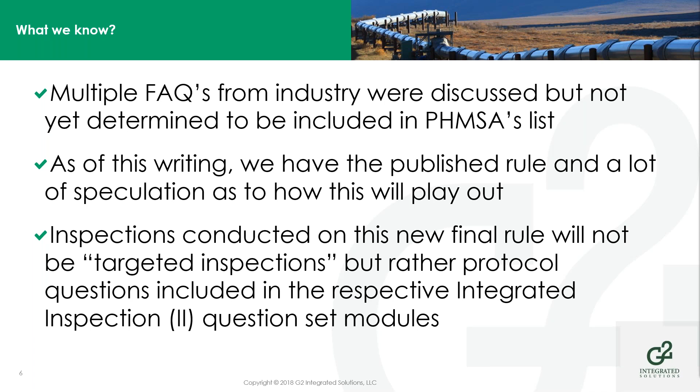Inspections that are going to be done on this final rule, as was instructed in that meeting, are not going to be targeted inspections. In other words, they're not going to come out and do an inspection based entirely on this final rule, but questions and inspection audit guidance will be given through the integrated inspection process and through those modules. Of course, if there are particular areas of this final rule that don't seem to be met with compliance, you could fully expect that PHMSA would come out and pay close attention to these new additions.

The major provisions of the rule were driven by the Pipeline Safety Act of 2011 and other things as well, but in particular, the 2011 Act added a 6-month grace period to the 7 calendar year reassessment interval. Many of our rules, as you know, have extensions added to them. Many of our reoccurring events give us a grace period, if you will. This Safety Act added that 6-month grace period, but again, it's something that has to be requested. It's not automatic. The Act also provided for the requirement to consider seismicity in identifying potential threats, and that operators have to report any exceedances of their transmission pipelines' MAOP.

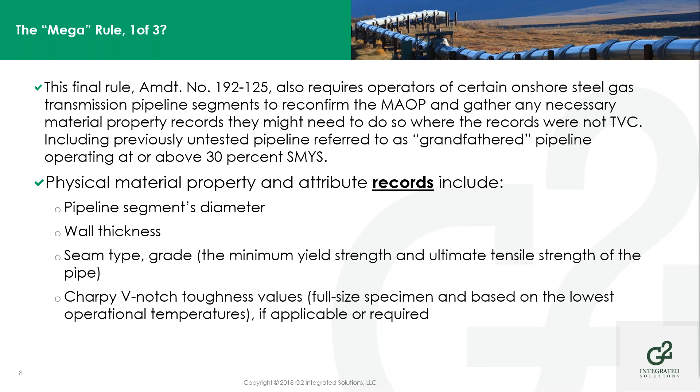It also requires operators of certain transmission lines to reconfirm the MAOP. Basically, this is talking about pipelines that do not have TVC records, traceable, verifiable, complete records, or were previously untested. They were grandfathered, if you will, in the beginning of the regulation. They have to determine their physical material property attributes, and the records have to include the segment's diameter, wall thickness, seam type, and grade. In other words, you basically have to figure out what kind of pipe you have in the ground if you don't know already.

Prior to the rule's publication, integrity assessments were only done for HCAs, correct? This particular rule now adds class 3 and 4 locations and a new defined area called moderate consequence areas. And these assessments have to be done within 14 years of the rule's publication, and then reassessments every 10 years

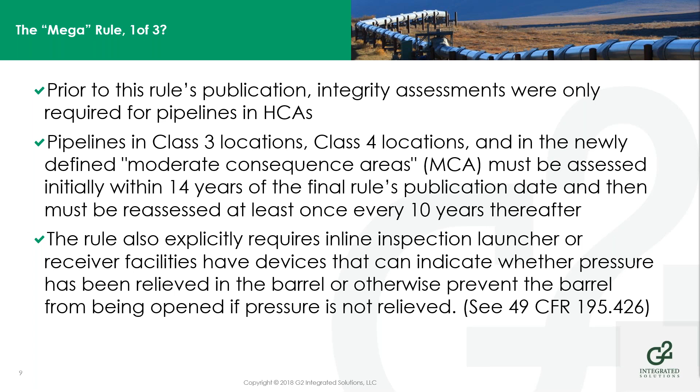thereafter. It also now requires that inline launchers and receivers on the gas transmission pipelines have a device that will indicate whether there's still pressure in the barrel, or be equipped with a door or a mechanism that won't allow that barrel to be opened if there is still pressure in the barrel, which is a very similar regulation that is also mirrored over in 195 for liquid pipelines and 195.426.

On April 22nd of this year, PHMSA issued a notice of enforcement discretion. The file name is Stay of Enforcement. PHMSA doesn't intend to take enforcement action relative to the July 1st, 2020 compliance deadline because of the national emergency that we're currently in. They're going to extend that period out to December the 31st, and normal enforcement will resume at that point in time. But that's not a get out of jail free card.

It's not a don't have to do anything card. It's simply saying PHMSA expects all affected operators to continue to work towards compliance, and they're going to fully expect to see your records demonstrating that you have done that. Even though you may not be able to achieve compliance by July the 1st, you're still making a concerted effort to do so.

Now, the rule itself, the amendments include 191 for reporting malfunction or operating error that causes the pressure to build up and allowed for operation of pressure limiting control devices to occur for underground natural gas storage facilities or LNG facilities. This section is broken out unto itself for those two areas, and then section 10 is added for transmission lines only.

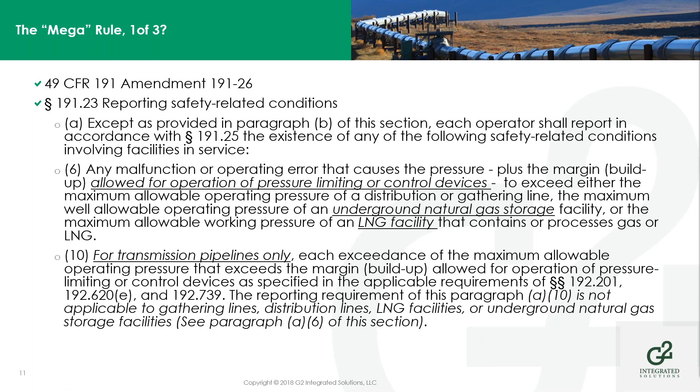You have to report that MAOP exceedance to PHMSA. It excludes the gathering lines, distribution lines, LNG facilities, and underground natural gas storage facilities. So that modification to the reporting of safety-related conditions was made. Also, filing safety-related condition reports, what has to be done now is it has to be sent to the associate administrator. That's a change. The 5 working days period is there, and the 10-day period is there for discovery and determination.

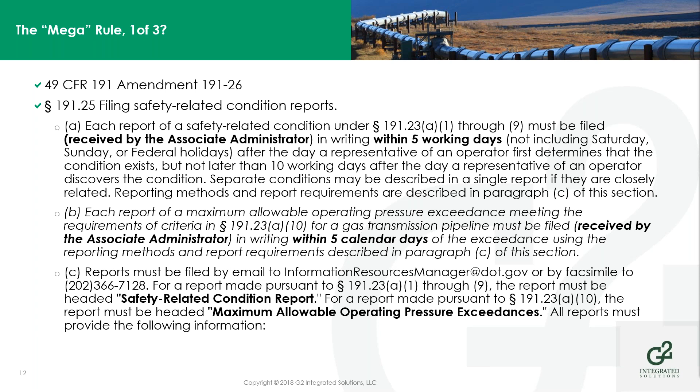Maximum allowable operating pressure exceedance is the same way, and the reports have to be filed or emailed, headed safety-related condition report, or headed maximum allowable operating pressure exceedance report, specifically to PHMSA in that time period, to the associate administrator. Filing has to include your operator ID now. The 8 items that are there are fairly the same, but there are some additions talking about having to make sure we have the operator ID included.

Sorry about that screen glitch.

New definitions in the code also include engineering critical assessment. It's a documented process that has to be done. You have to include the operating history in your assessment, the environment the pipeline lives in, the in-service degradation that you know about, possible failure mechanisms that you know about, final defect sizes, any future operating or maintenance procedures that are going to be used to determine the maximum tolerable sizes for imperfections.

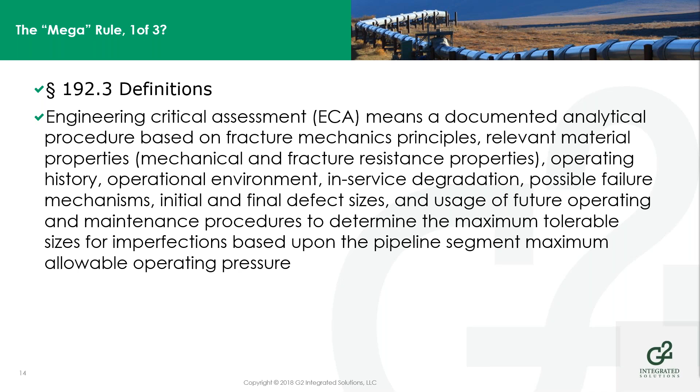So essentially, you're doing a critical assessment of the pipeline segment to determine the maximum allowable operating pressure. It's going to be a very detailed operation. It has to be very specific to the segment of pipeline that's in question. I don't think you're going to find a software package that you can plug the numbers into that is going to give you an answer. You're going to have to do this specifically for the segments that you're dealing with.

Moderate consequence area was added. It talks about a potential impact circle as defined in 903 based on the PIR: 5 or more buildings intended for human occupancy, and any portion of a paved surface or road. Now, the clarity for that paved surface road, including shoulders, designated interstate, freeway, expressway, principal arterial roadways, is contained in the Federal Highway Administration's Functional Classification Concepts, Criteria, and Procedures, Section 3.1.

So you go there and you look at what it says in that section of the regulation, and it gives you a better definition of what it's looking for. And of course, again, this is a moderate consequence area. It doesn't meet the definition of a high consequence area. So it doesn't supersede HCA. If it's an HCA, it's an HCA. But if it's an MCA, it's going to be included based on this criteria.

So the length of the moderate area extends axially along the pipeline, and it's going to go from the first potential impact circle and out through the outermost edge of the last contiguous potential impact circle. Contiguous, so it's connected with 5 or more buildings intended for human occupancy. But the roadway data is going to be a challenge here. A lot of the states, a lot of federal highways or databases are there.

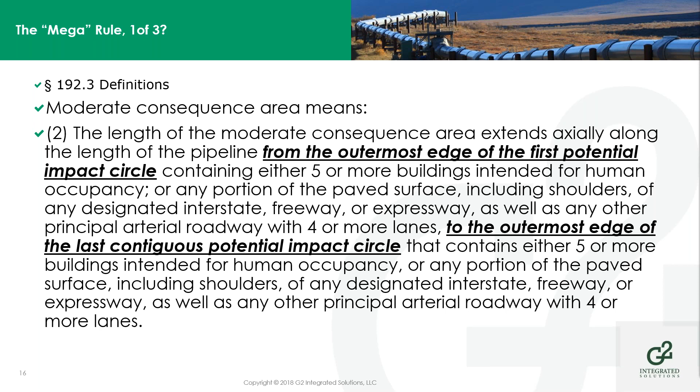But within our states, there are some areas in the country where that data defining these interstate, freeway, expressway, or arterial roadways may be a little more difficult to find. So it's going to be incumbent upon the operator to determine that based on their own operating conditions and where their pipelines cross these roadways.

Section 3.1 talks about other principal arterial roadways. For the most part, they fall into the top 3 functional classifications in that document, section 3.1. And the difference is there are usually multiple arterial routes serving urban areas, and then where there may be only a single arterial roadway serving a rural area.

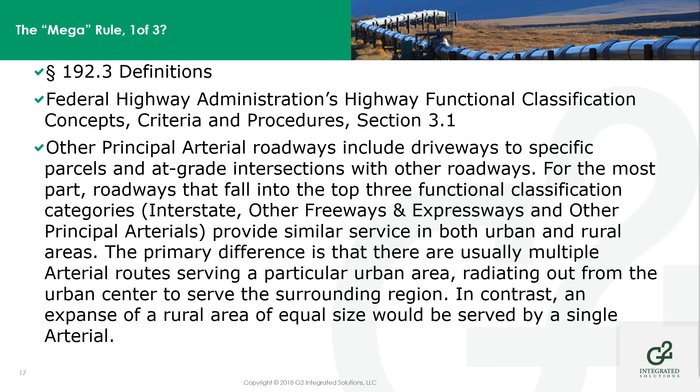Class locations: records have been added to class location definitions there, section D. You have to have records that document the class location of each pipeline segment and that demonstrate how the operator determined those sections. Where you didn't have to have that record in the past or it didn't specifically call it out, it now does.

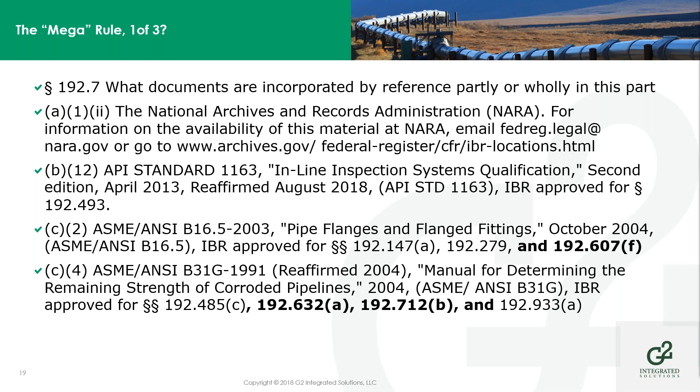And what documents are incorporated by reference? There's some changes here. There's some things that were added, and there are some references added. So for inline inspection systems, API 1163 was added. For ASME B16.5, for flanges and flanged fittings, a code reference was added for 607F. For B31G, for determining remaining strength, code citations 632A and 712B were added to that IBR section of the code, as well as the ASNT code references were added.

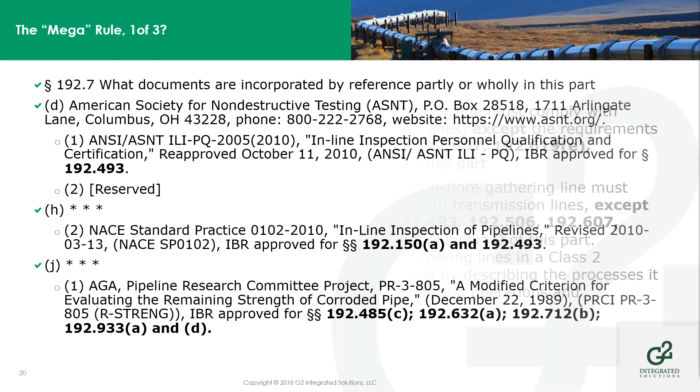Section D, this whole section was reorganized, so the old numbers don't line up with the new ones. But this ASNT inline inspection personnel qualification standard was added for section 493, and section H references the 192-150 and 192-493 sections of the code. And then of course the modified criteria for evaluating remaining strength, also 485, 632A, 712B, 933A were added as code citations, code references.

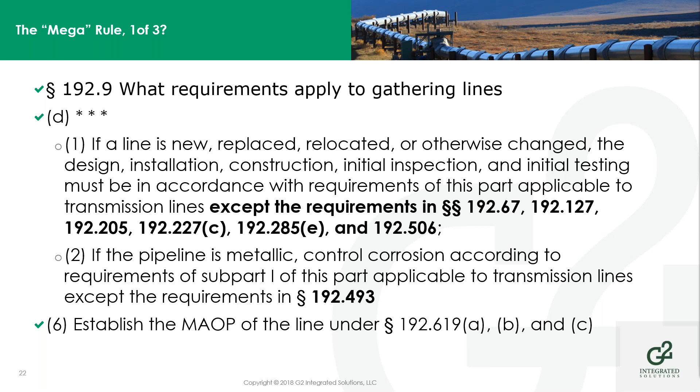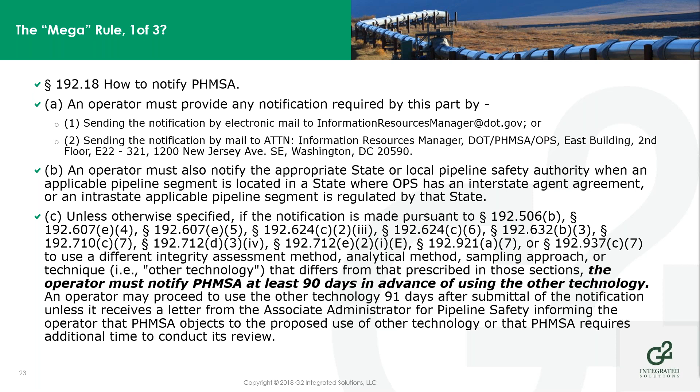So how to notify PHMSA? Section 18 was added to the regulation. This is the notification section, and it's referenced in multiple areas of the regulation. There are places where it says if you're going to do something, you have to notify PHMSA 90 days in advance of using other technologies. So basically 192.18 describes when you have to do that and how you have to do that notification process. And of course, any intrastate agency as well.

So 67 talks about records for material properties for steel transmission lines installed after July 2020. You must collect or make and retain for the life of the pipeline records documenting the physical characteristics of the pipe. For those steel transmission lines installed on or before July 2020, if you have records documenting the tests, inspections, specifications, you have to retain them for the life of the pipeline. And for anything installed on or before July 2020, if the operator doesn't have records, you must then follow 624 in establishing the material properties of your pipeline.

For 127, for pipe design records, again, basically the same thing, installed after July 2020. You must collect, make and retain for the life of the pipeline records documenting the pipe was designed to withstand its external pressures and loads. And for steel transmission lines on or before July 1st, 2020, have records to document the design and determination of design pressure. And then if you don't have records, again, you're going to follow 624, which we'll get to in a little bit.

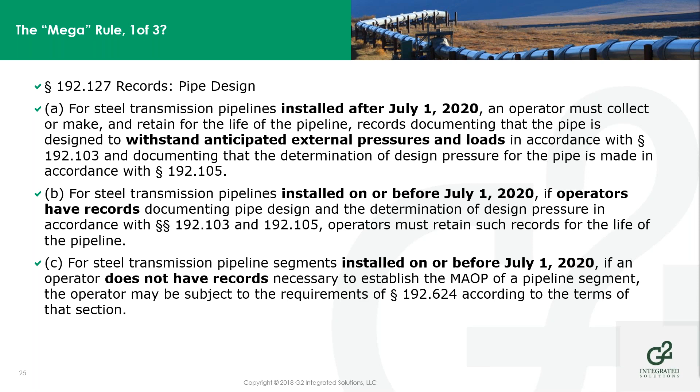Passage of internal inspection devices. This is the one where we talk about having to design and construct and accommodate the passage of ILI devices in your pipelines if they're built in the future. Except as provided in B and C, each new transmission line and each replacement pipe, valve, fitting or other line component. So as we go forward from July 1st, 2020, you're going to have to make sure that pipeline is designed and constructed or repaired with its ability to pass an ILI device.

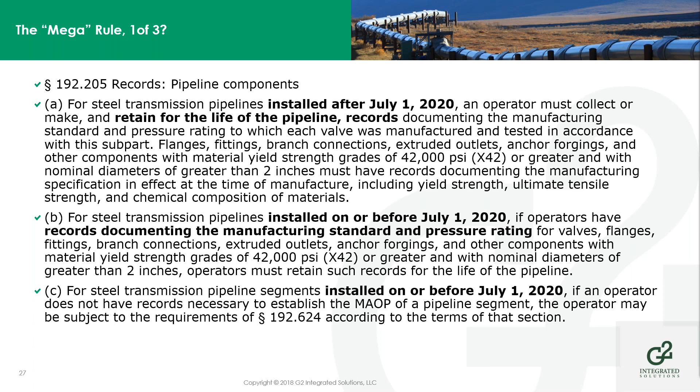Records again for pipeline components after July 1, collect or make or retain for the life of the pipeline those records documenting the manufacturing standards that the devices were built to for things greater than 2 inches and with yield strengths of 42,000 PSI or X42 pipe. For steel transmission lines installed before July 1st, 2020, if you have records documenting the manufacturing standard, you must retain those records for the life of the pipeline. And then again, if you do not have records to document that, you must follow 624.

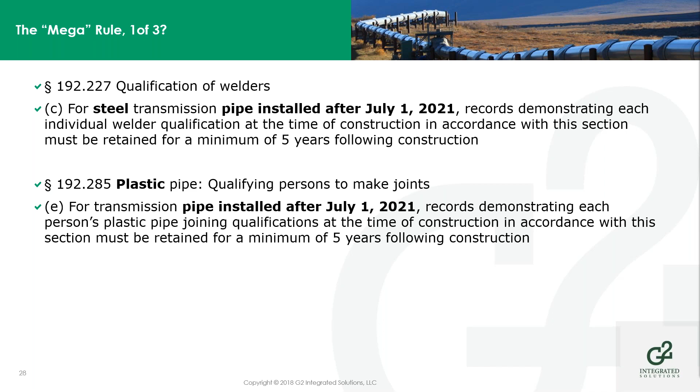Again, qualification of welders. This section was added for steel transmission lines. You have to maintain those records for pipe installed after July 1st for 5 years. For steel transmission, and for plastic pipe, same thing. After July 1st, 2021, they have to be maintained for a minimum of 5 years following construction.

Inline inspection has to be done in accordance with API 1163 or ANSI ILI PQ and NACE SP0102. You may also use tethered or remotely controlled tools, not addressed specifically in 0102, but you must comply with the sections of the NACE standard that are applicable, even though it's a tethered or remotely controlled tool.

Spike testing requirements, 506, says whenever a segment of transmission line is operated at a hoop stress at a level of 30% or more of SMYS, a spike test under this part must be conducted this way. Number one, it has to use water. The baseline test pressure must be specified as in the applicable paragraphs of 619 or 620. The test has to be maintained at a pressure above the baseline test pressure for at least 8 hours.

But within that first 2 hours of that 8-hour test, you must spike the pressure up to a minimum of the lesser of 1.5 times the MAOP or 100% SMYS, and that spike has to be maintained for at least 15 minutes. And that must be conducted within the first 2 hours of the 8-hour test.

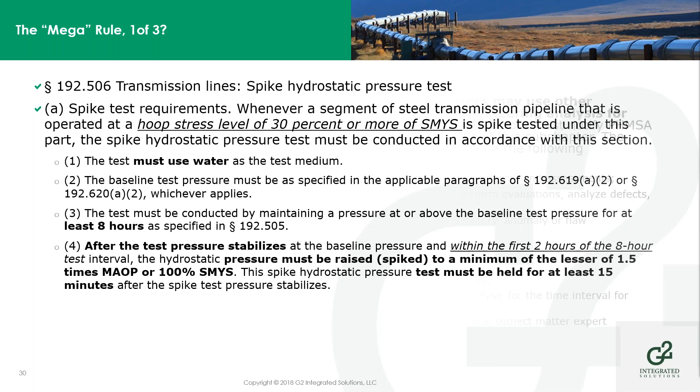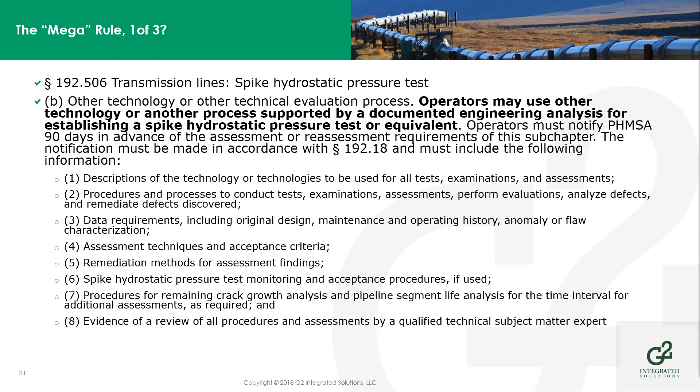Other technologies can be used to determine or document the engineering analysis for establishing a hydrostatic spike test. But again, you must notify PHMSA, and you have to include the following items in that notification: the technology you're going to use, the data requirements, the assessment techniques, and evidence of review of all procedures by a qualified technical subject matter expert prior to doing this. And an operator must make and retain for the useful life of the pipeline any and all tests confirming the pipeline's integrity.

607 talks about pipeline material properties and attributes. This section of the code is new. Whenever required by this part, operators must document and verify the material properties of their pipeline. And the records that have to be established under this portion of the code have to be traceable, verifiable, and complete records, and must be maintained for the life of the pipeline. So the end result of this has to be TVC records as well.

The values established under this section need to meet the requirements of the engineering critical assessment method described at 624(c)(3) or the fracture mechanics requirements in 712, and they have to be maintained for the life of the pipeline as well.

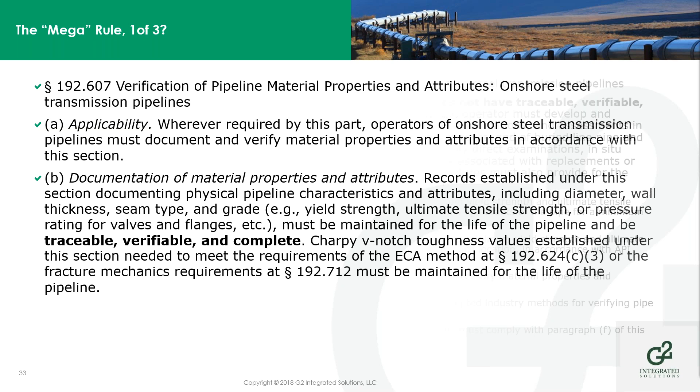The pipe material properties and attributes verification. If an operator does not have TVC records, they must develop and implement procedures for conducting non-destructive or destructive tests, examinations, assessments in order to verify the material properties. Now, when do you do this? It says in here what's called the opportunistic digs, or whenever excavations occur in the following opportunities.

So you're not being directed to go out and dig up your entire pipeline and verify the material properties. You're being told that when you have the opportunity to do so, you go out for anomaly direct examinations, for in situ evaluations. In other words, inside the pipe, you're going to run something, a tool in the pipe itself. Repairs, remediations, maintenance, excavations associated with replacements, third-party digs for another operator crossing your line, whatever opportunities you have to expose the pipe to get in there to be able to do these items listed here 1 through 5. And you have to have procedures to do these following things.

Now, I would suggest to you that you pay close attention here, that as you determine what these things are for your pipeline, and as you establish these procedures for non-destructive tests or examinations or toughness tests, you determine whether or not those things are going to be done on the pipeline facility and whether or not they meet the 4-part test of your operator qualification program. You may well have new qualifications, new covered tasks being identified here. But it is up to you again to make that determination, to do that analysis when you review the task work to be done.

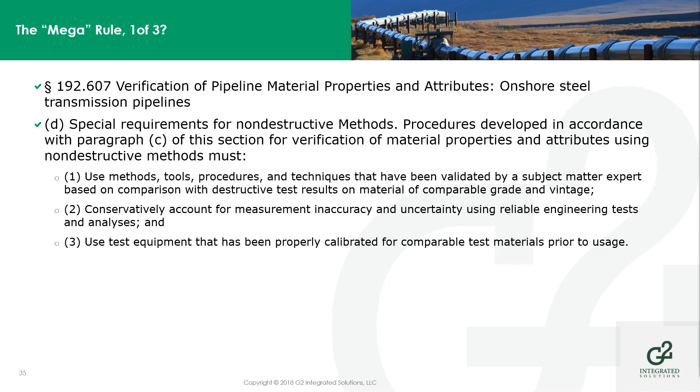Sampling multiple segments of pipe. The operator has to define separate populations. You need to be able to go out and determine what areas that you have pipeline segments that the population of the pipe are similar. They fall into a population density, if you will, but that pipeline manufacture or construction segments can't exceed 2 years. If the dates between those manufacture and construction exceed 2 years, you cannot consider that to be a defined population under this section.

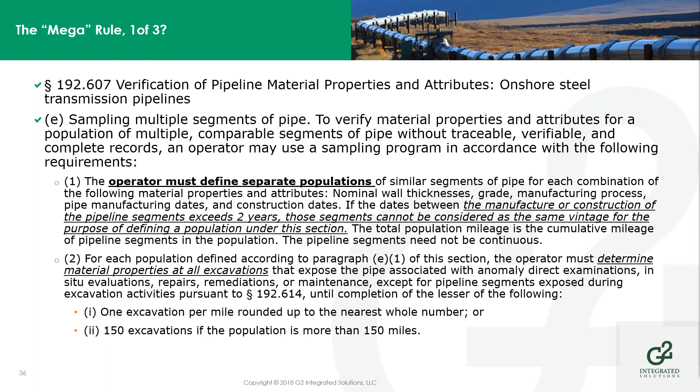So for each population defined according to paragraph E1, the operator must determine material properties at all excavations that expose the pipe with anomaly direct examinations, in situ evaluations, repairs, remediations, or maintenance, except for pipeline segments exposed during excavation activities pursuant to 614, until the completion of the lesser of the following. So 1 excavation per mile, rounded up to the nearest whole number, or 150 excavations if the population is more than 150 miles. That's the density of the measurements that have to be made.

Prior tests being done and conducted for single excavations according to this section can be counted as one sample. If the test results identify a line pipe with properties that aren't consistent, then an expanded sampling program has to be used to validate the statistical basis, where you can achieve at least a 95% confidence level that the material properties used in the operation and maintenance of the pipeline are valid. There has to be that 95% confidence level established there, and that has to be a documented process. How did you establish that?

And again, you can use an alternative statistical sampling approach, but again, you must make that notification in accordance with 192.18 to PHMSA. And that 90-day period that you're going to wait for a response is defined in 192.18. If on day 91 you don't get a response, then you can proceed with your process, but if you get a response back in that 90 days, you'll have to act accordingly.

For components of material properties under 607, you are not required to test for the chemical and mechanical properties of the components, but the verification of material properties is required for non-line pipe components. So within meter stations, compressor stations, reg stations, separators, river crossing headers, etc., you're not required to test for chemical and mechanical properties, but you are for the pipeline sections of the facility. And again, for larger than 2 inches, for X42 or greater pipe,

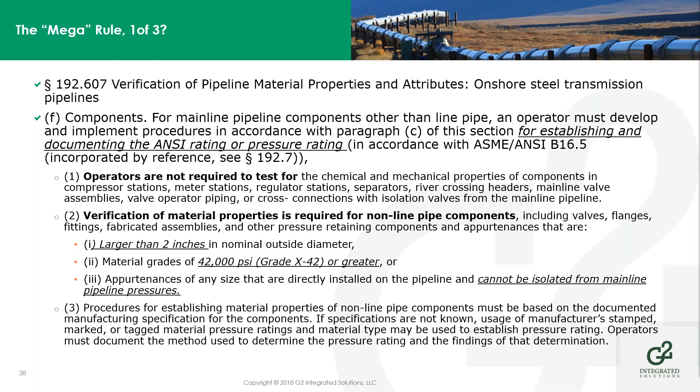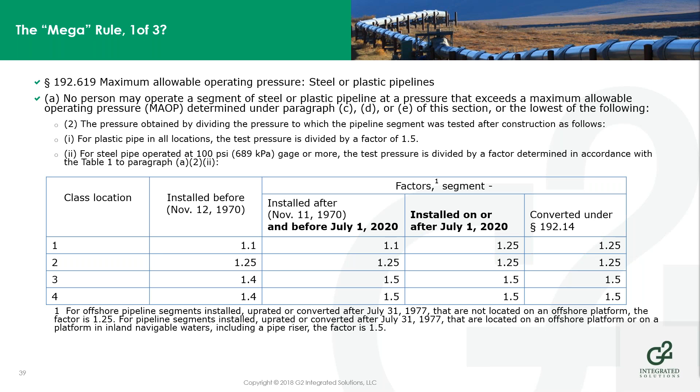Whether it's newly installed or whether it's converted under 192.14, those factors are going to remain from now on. Here in this section, the maximum allowable pressure determined by the operator to be the MAOP, accounting for records and material properties and so on and so forth in accordance with 607. So if you've got material verification done, you're using those records to determine that MAOP.

The requirements in A through D of this section: operators of the transmission line have to meet the criteria specified in 624, must establish and document the MAOP in accordance with 624. And we're going to see when we get there in a minute what that talks about. Steel transmission lines must make and retain records necessary to establish and document the MAOP.

Stop it, Wally. You got to quit moving that mouse around.

For pipelines in operation July 1st, retain the existing records. Pipelines in operation as of July 1st that do not have records and are required to reconfirm their MAOP in accordance with, must retain those records reconfirming the MAOP for the life of the pipeline. And for pipelines placed in operation after July 1st, must make and retain records establishing MAOP.

So if you got projects going on right now, and those projects are going to carry you through and after July 1st, 2020, please make sure your job boxes are maintained and up to date and all your records are coming in and all the proper signatures are there, and that you get those records and put them in your data set so that you can maintain them for the usable life of the pipeline.

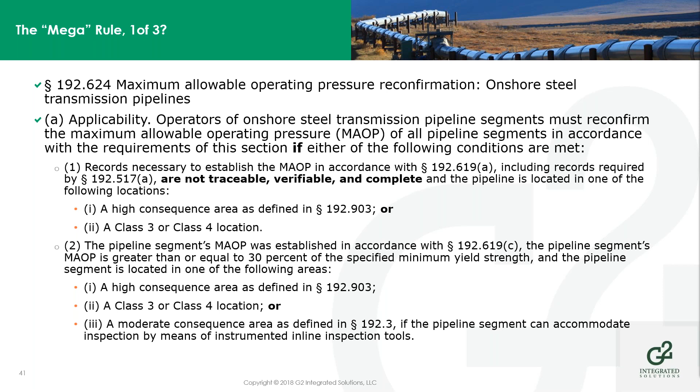or the pipeline segment's MAOP was established in accordance with 619C and the MAOP is greater than or equal to 30% of SMYS and the pipeline segment is located in a high consequence area, class 3 or 4 location, or an MCA, you must do a maximum allowable operating pressure reconfirmation. So that's all new.

Now, procedures and completion dates. Operators of pipelines subject to this section must develop and document procedures for completing all actions required by this section by July 1st, 2021. Make no mistake, that is not a date included in the stay of enforcement document that came out earlier this month. You have to complete all the actions required by this section on at least 50% of the mileage by July 3rd, 2028, and complete 100% of the mileage by July 2nd, 2035.

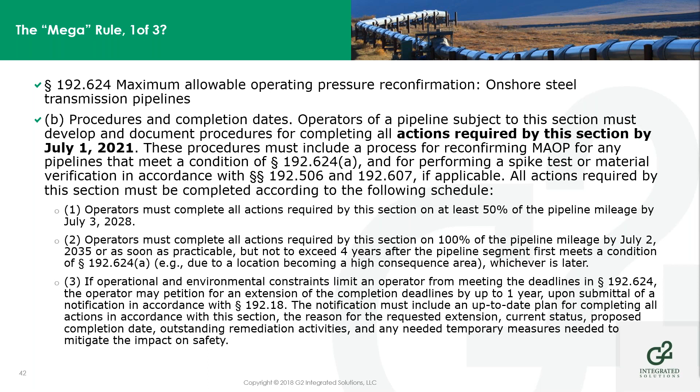Okay. If operational or environmental constraints limit an operator from meeting the deadlines, the operator may petition for an extension. The notification must include an up-to-date plan. You're not just going to say, I need an extension, please let me go out 5 more years. You're going to have to give them a plan as to how you're going to complete that work within the specified time frame that you've established.

Pressure, variety of methodologies to be followed here. The maximum allowable operating pressure determination: meeting the condition of paragraph A, you must reconfirm using one of the following methods, and there are several here listed. Number 1 is a pressure test, following the table we showed in 619 A2II.

Material property records have to be there. Material property verification has to be there in accordance with the code requirements in 607 for a pressure test.

Or you can do method 2. You can take a pressure reduction. You can reduce the pressure as necessary and limit the MAOP to no greater than the highest actual operating pressure sustained by the pipeline during the 5 years preceding October 1st, 2019, divided by the greater of 1.25 or the applicable class location factor found again in A2II in the table.

So the highest actual sustained pressure has to have been reached for a minimum cumulative duration of 8 hours during a continuous 30-day period. The value used as the actual highest sustained pressure must account for differences between upstream and downstream pressures. So it's not just a matter of picking a high point on the chart or on the SCADA data or on the pressure record.

It has to be an 8-hour period of continuous operation in a 30-day period. And then it has to meet these other accountabilities for upstream and downstream pressures in the pipeline for variances that are going to occur.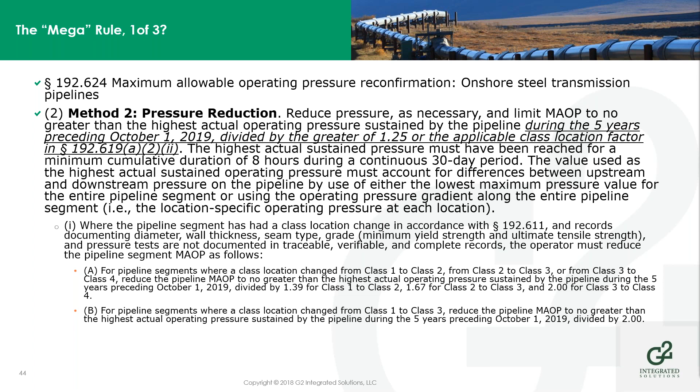Method 2 also talks about where the segment had a class location change. The pipeline where the class location changed from 1 to 2 or 2 to 3, you have to divide by 1.39 for class 1, 1.67 for class 2, and 2.0 for class 3 and 4. So you're going to take a big reduction if you do the pressure reduction method when you don't have the material information that you need.

As well, for method 2, if an operator elects to use method 2 but desires to use a less conservative pressure reduction factor for a longer look back period, the operator has to notify PHMSA again. And there we are again with 192.18, no later than 7 calendar days after establishing the reduced MAOP, and the notification has to include this information.

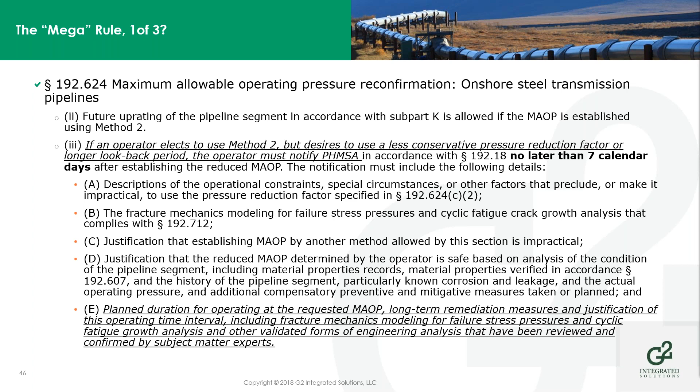The planned duration, item E, is the planned duration at the requested MAOP, long-term remediation measures, and justification of this operating time interval, including fracture mechanics modeling for failure stress pressures and cyclic fatigue growth analysis and other validated forms of engineering analysis that have been reviewed and confirmed by an SME. So it's going to be a process that has to be followed.

Method 3 talks about an ECA. You're going to reconfirm your MAOP following an engineering critical analysis. Or you're going to follow method 4, pipe replacement. Simply because you don't know what it is, you're going to go put new pipe in the ground.

Pressure reduction for pipeline segments with small impact radius, with small PIRs. You can reduce the MAOP to no greater than the highest operating pressure sustained during the previous 5 years, divided by 1.1, as long as that pressure was sustained for a cumulative 8-hour period during one continuous 30-day period.

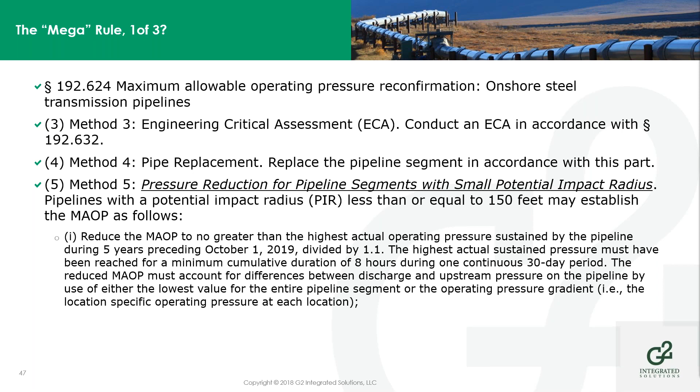Now, if you use this process, you must conduct patrols in accordance with 705 A and C, and conduct instrumented leakage surveys in accordance with 192.706 at intervals not to exceed those in the following table. So you're going to increase the number of surveys and patrols that you're going to do to accommodate this last method of reestablishing your MAOP.

Method 6 is alternative technology. And again, if a new technology is out there, if something's available to you that you want to use, you found that it works, it meets some industry standards, whatever, you're going to have to notify PHMSA in advance, again, following 192.18. You're going to have to ensure the results are consistent with the required corresponding hydrostatic test pressure for the line segment being evaluated.

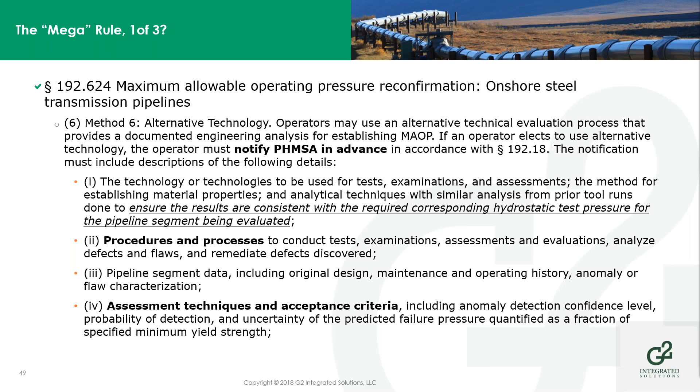You're going to have to make sure your processes and procedures are in place to conduct the tests, making sure the segment data that you have is correct, and assessment techniques and acceptance criteria have been established and confirmed. And if any segment contains cracking, the operator has to estimate the remaining life of the pipeline.

And of course, at the end of 624, records. You must retain the records of all these test analyses, assessments, repairs, methods that are going to be used, how those methods were implemented, and any other actions taken for the life of the pipeline.

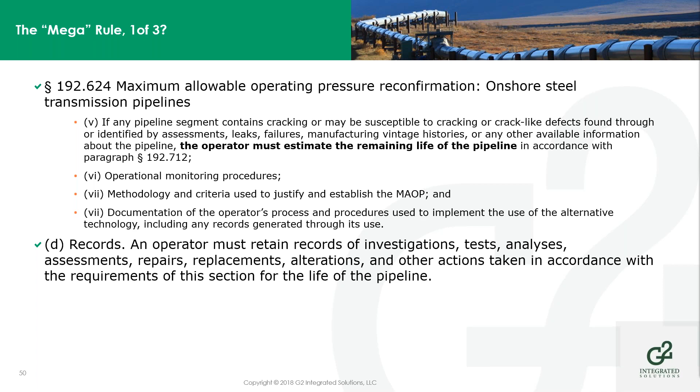For ECA, this is a pretty detailed statement in the regulation now as to what they want done. When you conduct an MAOP reconfirmation using method 3, using an ECA to establish the material strength and MAOP of the pipeline, it must comply with the requirements of this section.

It must assess the threats, the loadings, operational circumstances relative to those threats, including along the pipeline right-of-way, outcomes of the threat assessment, relevant mechanical and fracture properties, in-service degradation or failure processes, and initial and final defect size relevance. This ECA has to quantify those interacting effects of threats on any defect in the pipeline.

Again, this is one of those things where I don't think we're going to wind up out here with a package that says, come do this and we'll establish your ECA analysis for you. It's going to be a pretty detailed process. It's going to require some very explicit information about the pipeline segment being reviewed.

The material properties in accordance with this paragraph have to be the diameter, the wall thickness, the seam type and grade, the Charpy V-notch toughness values based on the lowest operational temperatures as applicable. If any material properties required are not documented, traceable, verifiable, and complete, they have to be done so in accordance with 607. So you have to establish TVC records for this process to be followed.

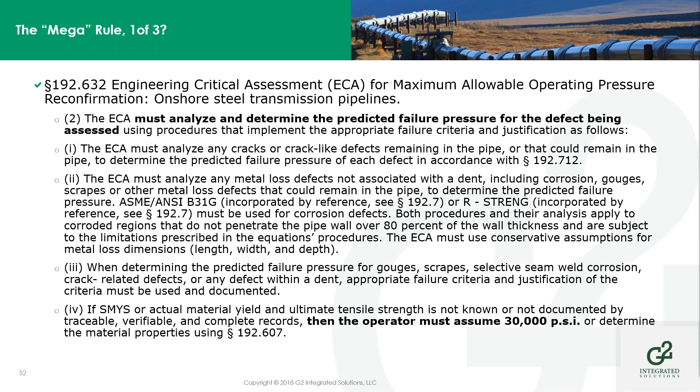You must analyze and determine the predicted failure pressures for the defect. And if SMYS or actual material yield and ultimate tensile strength is not known or not documented, then the operator must assume 30,000 or determine the material properties following 607. So it's either one or the other.

The ECA must analyze the interaction of defects, determining the most limiting predicted failure pressures. It must establish the lowest predicted failure pressure for any known or postulated defect or interacting defects.

Sorry about the dog next door. The beauties of working from home, right?

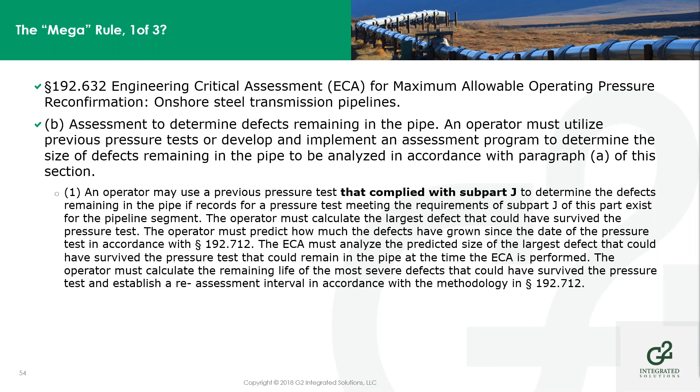For the ECA, an operator must use a previous pressure test that complied with subpart J. You may use that pressure test if you have one, as long as it met the requirements of subpart J, and predict how much the defects have grown since that date in accordance with 712. You must analyze the predicted size of the largest defects that could have survived the pressure test that could remain in the pipe at the time.

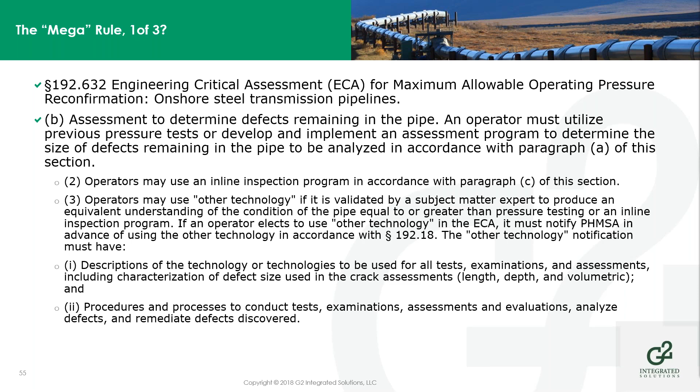For the ECA assessment, to determine the defects, you must utilize a previous pressure test or develop and implement an assessment program. Use an inline inspection program. You may use other technologies, provided those other technologies in the ECA have been notified to PHMSA and they know what you're going to do and they've accepted that idea. You have to have the descriptions of the technology or technologies used for all tests, and procedures and processes to conduct those tests have to be defined prior to them being done.

For an inline inspection program to determine the defects, pipeline segments that might be susceptible to hard spots must include a tool that can detect hard spots. If the pipeline has a reportable incident as defined in 191.3 attributed to a girth weld failure, then the tool has to be able to detect girth weld defects. And inline inspection must be performed in accordance with 192.493.

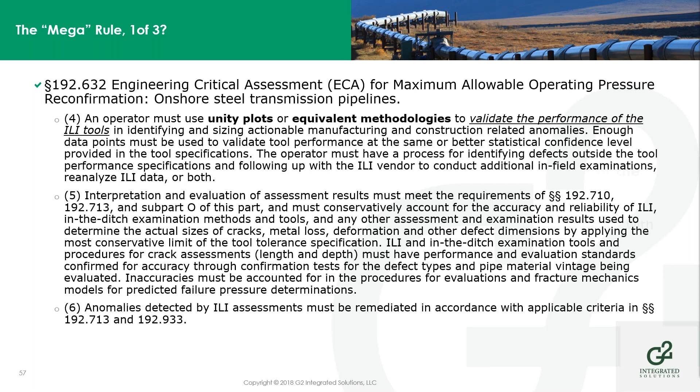An operator must use unity plots or equivalent methodologies to validate the performance of the ILI tools. So you run the ILI to follow this ECA process. You need to make certain that the data that you get out of that tool is valid and it's been confirmed, and you have supporting data that says it's good information and it supports your assessment. Inaccuracies have to be accounted for in the procedures for evaluations and fracture mechanics models and predicted failure pressures. Calling our ILI contractors to task here to make sure we're getting good information.

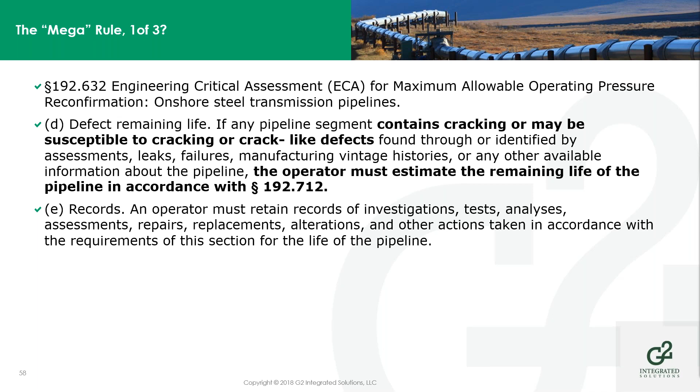If the process involves pipelines that contain cracking or may be susceptible to crack-like defects, the operator must estimate the remaining life of the pipeline in accordance again with 712. And of course, maintain all of these records that were done for these tests and analysis for the life of the pipeline.

Now, 710 talks about the assessment of areas outside of HCAs. Onshore transmission lines with an MAOP greater than or equal to 30% and located in a class 3 or 4 location, or a moderate consequence area, if the segment can accommodate inspections by an ILI. It does not apply to pipeline segments located in HCAs. So this applicability applies to those pipelines in class 3 or 4 locations, or moderate consequence areas.

In general, the operator must perform initial assessments in accordance with this section no later than July 3rd, 2034, or as soon as practicable, but not to exceed 10 years. You must perform a periodic assessment at least once every 10 years thereafter at intervals not to exceed 126 months. There's that grace period. Or shorter reassessment intervals based on the type of anomaly. If there's issues found on the pipeline that says you need to look at it more frequently, then of course

you would do that. And you may use any prior assessments conducted before July 1st, 2020 as an initial assessment for the pipeline if the assessment met the Subpart O requirements of Part 192 for ILI at the time. And then of course, MAOP verification, integrity assessments conducted in accordance with requirements of 624 for establishing MAOP may be used as the initial assessment method.

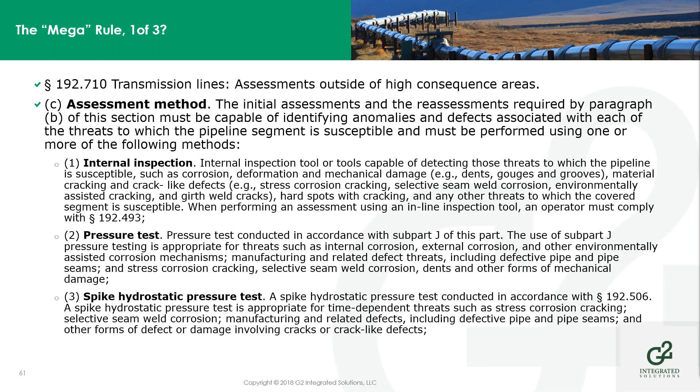The initial assessments and the reassessments required must be capable of identifying anomalies and defects using one or more of the following methods. So we're going to use ILI, we're going to use pressure tests, we're going to use spike hydrostatic pressure test, we're going to do direct examination, guided wave ultrasonic testing, direct assessment. Use of direct assessment for threats other than the threat for which the direct assessment method is suitable is not allowed. So the use of direct assessment has to address the threats of external corrosion, internal corrosion, stress corrosion cracking, or any other technology, again, after notifying PHMSA through 192.18.

The assessment method, the operator must analyze and account for the data obtained using personnel qualified by knowledge, training, and experience. Make sure, as we've seen in the past in enforcement actions that PHMSA has used, when language like this is used in the code, personnel qualified by knowledge, training, and experience, I would suggest to you that outside training, engineering degrees, etc., are certainly countable, can be considered, but you must include your own processes and procedures in that training and experience. So make certain that those folks doing this work for you have been trained in your processes and your procedures, and you deem them qualified to do the work for you, besides the outside education that they may have received.

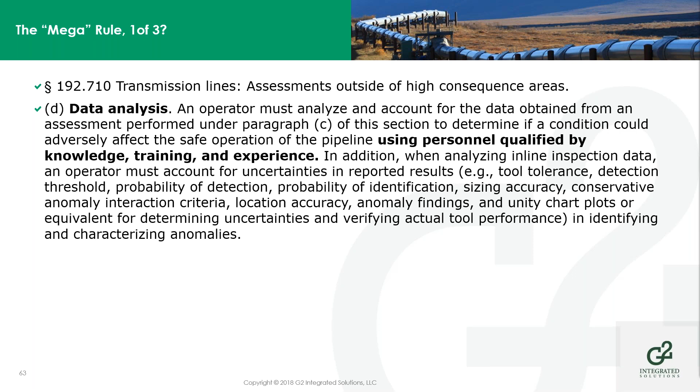Discovery of a condition occurs when an operator has adequate information about the condition to determine the condition presents a potential threat. You must promptly, but no later than 180 days after conducting an integrity assessment, obtain sufficient information about the condition to make the determination. Much of this language is the same. The operator must comply for remediation with 192.485 and 711 and 713 if a condition could adversely affect the safe operation of the pipeline. In an analysis of that information, you must account for all available relevant information about the pipeline in complying with this requirement.

Applicability of 712, predicted failure pressures. Operators of steel transmission must analyze anomalies or defects to determine the predicted failure pressure at the location of the anomaly or defect and the remaining life of the pipeline segment at the location of the anomaly or defect. You must use a suitable remaining strength calculation, either B31G, RSTRENG processes, or an alternative equivalent method of remaining strength, provided an equally conservative result is reached.

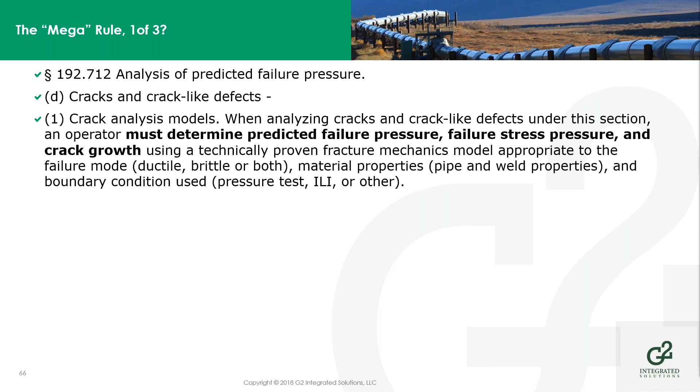Crack and crack-like defects have to be considered and must determine the predicted failure pressure using a technically proven fracture mechanics model. And again, this is going to be at the location where the condition exists on the pipeline. Crack and crack-like defects also, the fatigue analysis must be performed using an applicable fatigue crack growth law, and they have to be evaluated by an SME. You must calculate the remaining life of the pipeline, determining the amount of time required for the crack to grow to a size that would fail at MAOP of the pipeline.

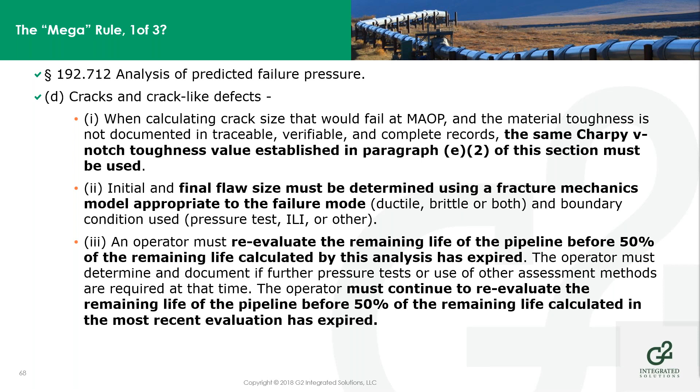When calculating cracks that would fail at MAOP and the material toughness is not documented, traceable, verifiable, complete, the same Charpy V-notch toughness value established in paragraph E2 must be used. Initial and final flaw size has to be determined using fracture mechanics. And the operator must reevaluate the remaining life of the pipeline before 50% of the remaining life calculated by this analysis has expired. So you must determine and document if further pressure tests must be done, and you must continue to reevaluate the remaining life of the pipeline before 50% of the remaining life calculated in the most recent evaluation has expired. In other words, you got to keep looking at it. It's not a one done event.

And you have to calculate the largest potential crack size defect using the methods in paragraph D1, following these Charpy V-notch toughness values based upon minimum operational temperatures of a full-size specimen. And then, of course, the description here for the toughness values, comparable pipe, determine the toughness based on material properties, so on and so forth.

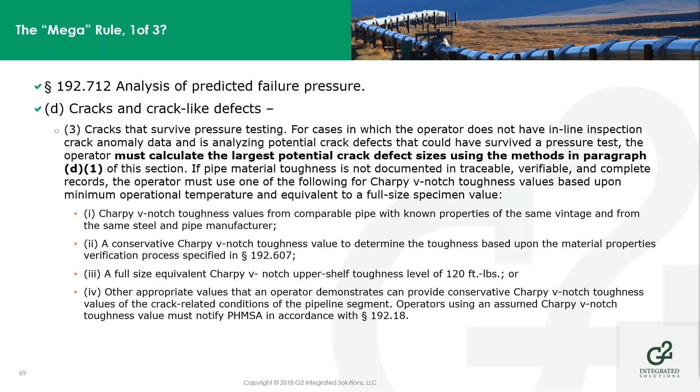An operator must explicitly analyze and account for uncertainties in reported assessment results. So anything that's there that is not normal, anything outside the boundaries of a normal condition. Once we've established the detection thresholds, probability of detection, probability of identification, those things all have to be considered by whatever method you're going to use to do the analysis. And it must utilize pipe and material properties that are documented in TVC complete records. And again, if not TVC, go back to 607.

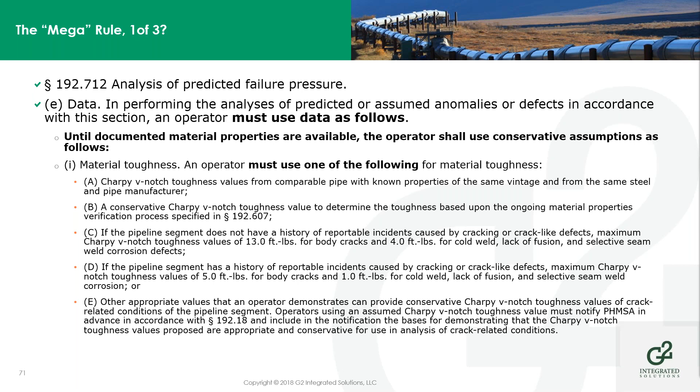In performing the analysis, you must use the data as follows. Until documented material properties are available, you shall use conservative assumptions as follows. For material toughness, you have to do one of these items listed here: the Charpy V-notch toughness values from comparable pipe, toughness values based upon an ongoing material property verification process, and so on. There are 5 different items listed that you can follow to get these results.

In performing the analysis, you must use the data as follows. Material strength: you have to assume one of the following material strength values: grade A pipe at 30,000 psi, or the SMYS strength on the basis of the current maximum allowable operating pressure. Pipe dimensions and other data: until the pipe wall thickness, diameter, and other data are determined and documented, the operator must use the values upon which the current MAOP has been based.

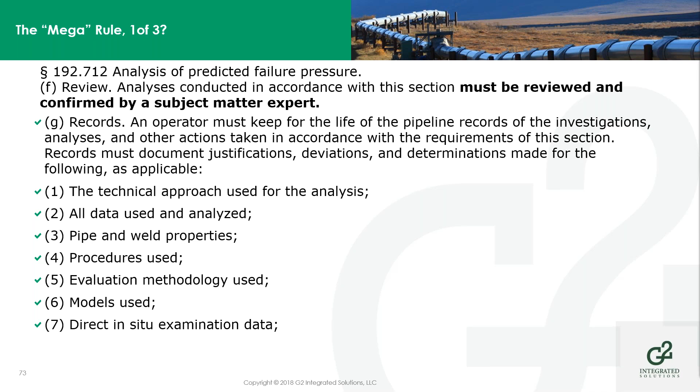The analysis must be reviewed and confirmed by an SME. All records in accordance with 712 have to be maintained. An operator has to keep, for the life of the pipeline, the records of these investigations, analyses, and other actions taken. Records have to document justifications, deviations, and determinations made for the following as applicable: the technical approach used for the analysis, the data used, pipe and weld properties, procedures followed, evaluation methods, models, direct in situ examination data.

There's only 19 of them. Hang on, we're going to get there.

Inline inspection tools, pressure test data, in-the-ditch assessments, all measurement tool assessment and evaluation, accuracy specifications, tolerances, all finite element analysis results, pressure cycles to failure and predicted fatigue life, predicted failure pressures, safety factors, reassessment time intervals, date of the review, confirmation of the results by qualified technical subject matter experts, and approval by responsible operator management personnel.

Just those 19 items and you're done.

192.750 talks about launcher and receiver safety after July 1st, 2021. This is the gotcha regulation like they have in 195. If someone on your pipeline after July 1st, 2021 is injured operating a launcher or receiver barrel because there was pressure in the barrel, you have no excuse. You must have a device capable of safely relieving pressure in the barrel before removal or opening of the launcher. So it has to be such that they can see the pressure in the barrel and know it's been relieved, or there's a device that will prevent the opening of the barrel or the closure if there is still pressure there.

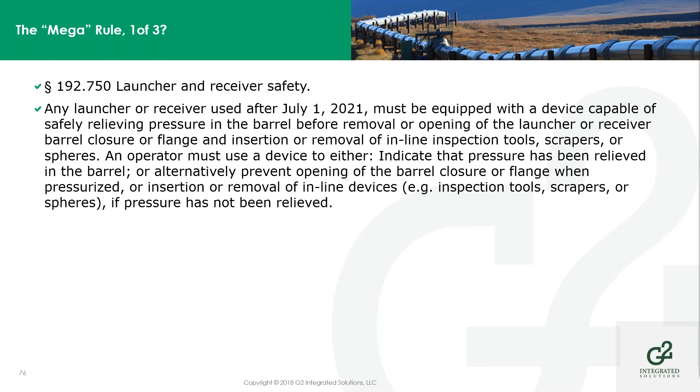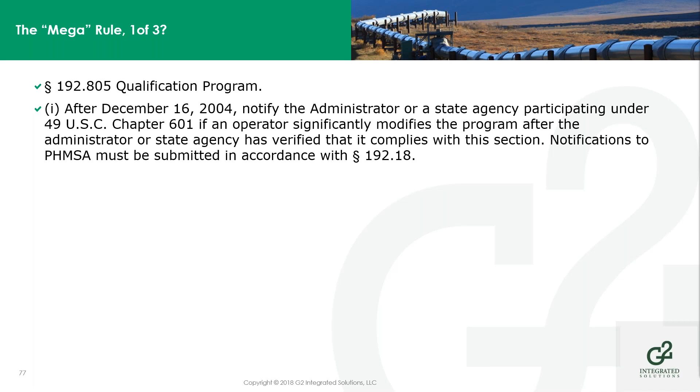Last item in the rule update, OQ. Now, why is it here? Well, it's because 192.18 has now been listed with the operator qualification rule, but I still will suggest to you that your OQ departments do a good assessment of this new regulation and determine whether or not any new covered tasks are being identified here that will cause you to have to increase or qualify personnel to do that work.

909, how can you change your integrity management program? Again, you're going to use 192.18. I would suggest to you that you're probably going to make changes to your IMP program because of this rule. If you make substantial program effects or significant modifications, then you must notify PHMSA within 30 days after adopting the change.

How do you identify potential threats in the pipeline integrity system? Time-dependent threats: you must analyze and account for whether cyclic fatigue or other loading conditions, including ground movement, suspension bridges, or other threats in the covered segment could exacerbate cyclic fatigue. Prioritize the integrity baseline assessment. Monitor operating pressure cycles at least every 7 calendar years, not to exceed 90 months. Determine if the cyclic fatigue analysis remains valid.

You must consider seismicity. Now, unlike our roadway consideration for moderate consequence areas where we were given the federal highway data to use, for seismicity we're really not given a whole lot of information. There's a variety of things that we can use to determine whether seismicity is a threat to our pipeline.

Manufacturing and construction defects. If any of the following changes occur in the covered segment, an operator has to prioritize the covered segment as a high-risk segment: the segment has experienced a reportable incident due to an original manufacturing-related defect. Need to chase that down, figure out when the construction, installation, or fabrication-related defects may have occurred, when the manufacturing defect may have occurred, making sure that the analysis is done properly and accounts for the results of any prior assessments.

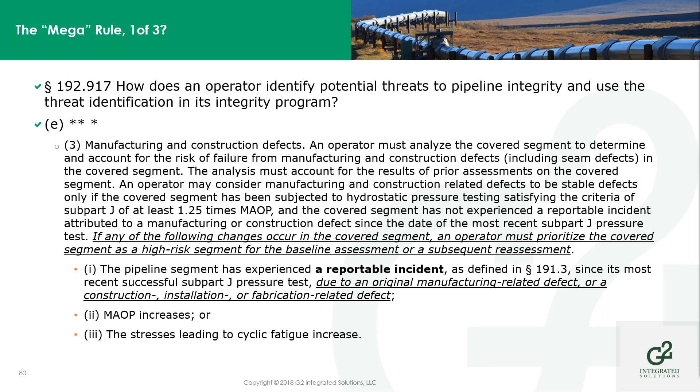As well for ERW pipe, if the covered segment contains low-frequency ERW pipe, lap welded pipe, pipe with longitudinal joint factor less than 1, other pipe that specifies a condition in B31.8S, pipe has experienced seam failures, including seam cracking, selective seam weld corrosion, right? Operating pressures increased over maximum operating pressure experienced during the preceding 5 years.

The operator must select an assessment technology or technologies with a proven application capable of assessing the seam integrity, seam corrosion anomalies. So quite specifically for ERW pipe or lap welded pipe, you have to do an assessment to determine whether or not that threat exists, and an assessment tool that will allow you to determine whether or not that's a threat to your pipe.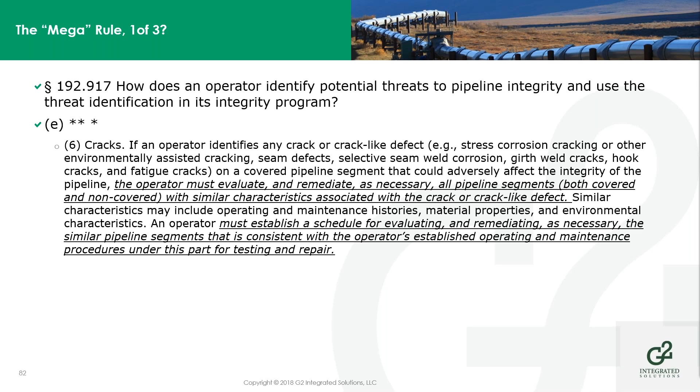And for cracks, you have to evaluate and remediate as necessary all pipeline segments, both covered and non-covered, with similar characteristics. You have to establish a schedule for evaluating and remediating those anomalies as necessary, and for segments that are consistent with the operator's established operating and maintenance procedures for testing and repair.

921 talks about a baseline assessment. An operator must assess the integrity of the line pipe at each covered segment, the internal inspection tool or tools capable of detecting those threats. Right, an operator must select a method or methods best suited to address the threats identified. So the use of internal inspection tools is appropriate for threats such as corrosion, deformation, mechanical damage, cracking, crack-like defects, hard spots, to which the covered segment is susceptible.

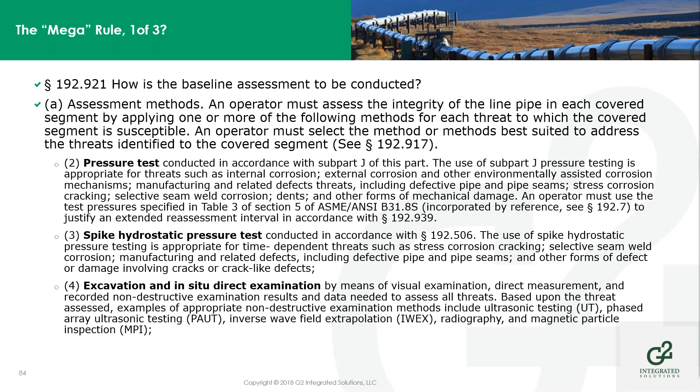Pressure tests, you select the method or methods best suited to address the threats. Pressure test may be the best method to assess the threat. A spike hydrostatic pressure test, excavation, in situ direct examination are methods to do the baseline assessment, using guided wave, using direct assessments, any other technology. Again, once notified to PHMSA. Baseline assessments for the segments with a reconfirmed MAOP, integrity assessments conducted in accordance with the requirements of 624 can be used as that baseline assessment if you follow that path.

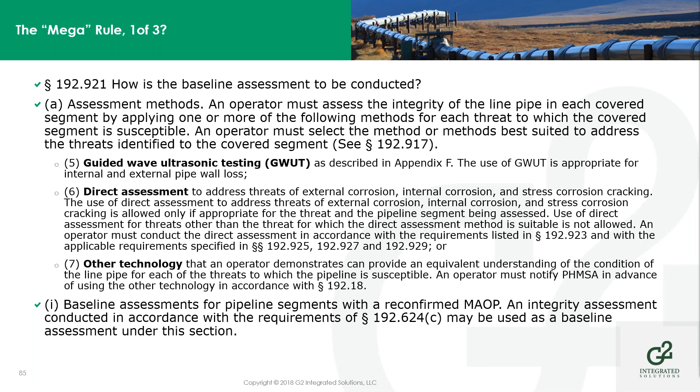Now, what do you have to do to address integrity issues? Temporary pressure reduction has to be taken. Long-term pressure reductions can be taken. And additional preventative and mitigative measures, you can determine that the outside force is a threat to the integrity of the covered segment. Seismicity of the area, you have to take measures to minimize the consequences to the covered segment, including increasing the frequency of aerial, foot, or other methods of patrols, adding external protections, reducing external stress, relocating the line, or inline inspections with geospatial and deformation tools. So again, this seismicity issue is something that you're going to have to deal with.

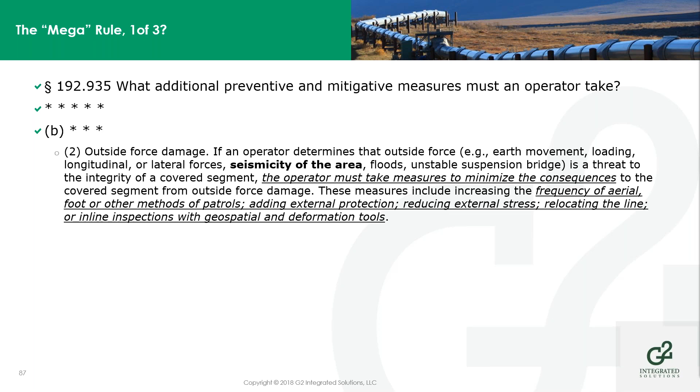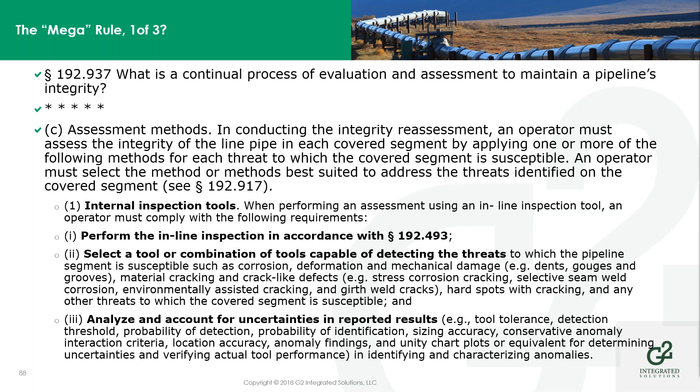Continual process of evaluation. An operator must select the method or methods best suited to address the threats. Using ILI tools, performing inline inspections in accordance with 493. Select a tool or combination of tools capable of detecting the threats of your pipeline. Analyze and account for uncertainties in the reported results. Pressure tests can be used, spike tests, excavation, in situ direct examination, guided wave, direct assessment, other technologies, or confirmatory direct assessments can be used. And of course, the reconfirmation assessment and integrity assessments conducted in accordance with this requirement may be used. If you did 624, you can use that as a reconfirmation assessment.

Required assessment intervals. The maximum allowable reassessment interval is 7 calendar years. And you may request a 6-month extension of that 7-year period, and you must do it in accordance with 192.18. If you establish a reassessment interval greater than 7 calendar years, you must within 7 calendar years conduct a confirmatory direct assessment of the covered segment, and then conduct a follow-up reassessment at the interval the operator has established.

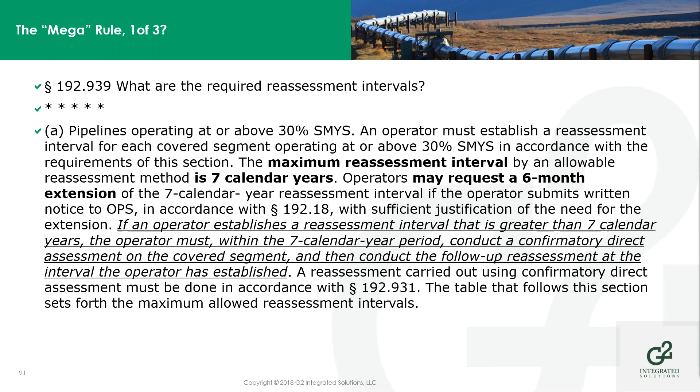Pipeline operating below 30% SMYS, the maximum reassessment interval again is 7 years, and you can again request that 6-month extension. You can do reassessment by pressure test. You have to establish that reassessment by at least one of the following. The pressure test, again, can be done.

And last but not least in our discussion, as we're winding up here with a few minutes left, 192.12 was modified at the same time in March. It became effective March 13th of 2020 for the underground natural gas storage facilities. The biggest thing here is the new regulation does not contain any language about the mandatory, non-mandatory language in the standards. So they are as they are written.

If you have a solution mined salt cavern constructed after March 13th, 2020, it has to meet the provisions of API 1170 and Section 8 of 1171. If you have a solution mined cavern that was constructed between July 18th, 2017 and March 13th, it again has to meet the provisions of 1170 of this section and Section 8, applicable to the physical characteristics and operation of the facility.

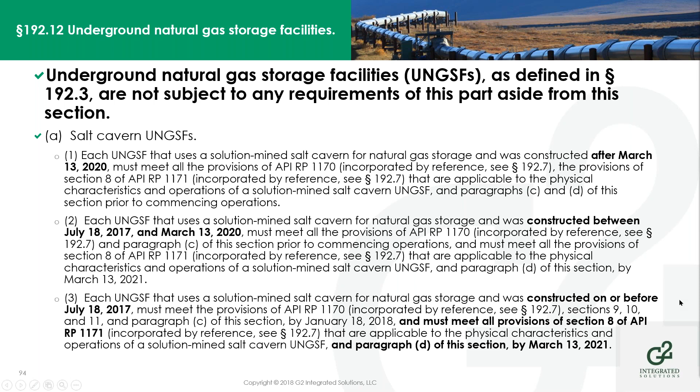And if you have a solution mined salt cavern constructed on or before July 18th, 2017, you have to meet the provisions of 1170 and Section 8 of 1171 and paragraph D of this section by March 13th, 2021. For depleted hydrocarbon reservoirs and aquifer reservoirs constructed after July 18th, 2017, you have to meet all the provisions of 1171.

And if you have such a facility, hydrocarbon reservoir or aquifer, constructed on or before July 18th, 2017, you have to meet the provisions of 1171 incorporated by reference, sections 8, 9, 10, 11, and paragraph C of this section by January 18th, 2018, and must meet all provisions of paragraph D of this section by March 13th, 2021. So there's some old dates in there that are still holding true, right?

And procedure manuals must be prepared and followed for each facility. One or more manuals of written procedures for conducting operations and maintenance, emergency preparedness and response. And you must keep those records necessary to administer such procedures and review and update these manuals at intervals not to exceed 15 months, but once each calendar year. And you must have those written procedures in place before commencing operations or beginning an activity not yet implemented.

Again, integrity management, you must have an integrity management program for each of your underground storage facilities. It must consist at a minimum of the framework developed under API 1171 and Section 8 of the risk management for gas storage operations. It must include the following elements.

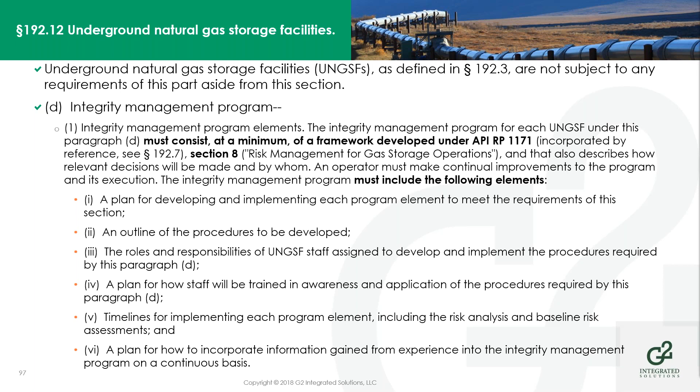You have to develop and implement the program element to meet the requirements of this section, an outline of the procedures to be developed, the roles and responsibilities of the staff, a plan for how the staff will be trained, timelines for implementing each program element, including the risk analysis, and a plan for how to incorporate information gained from experience into the integrity management program.

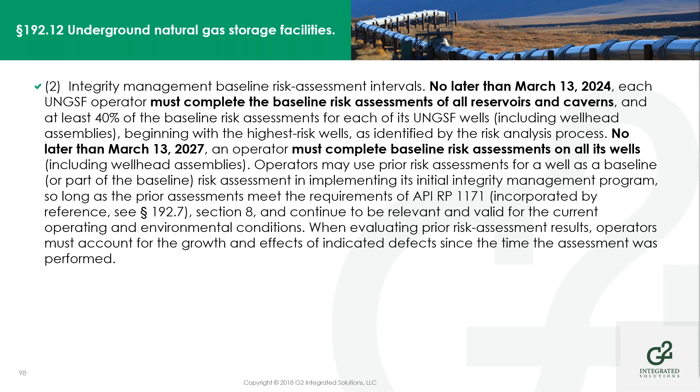And this program, the baseline risk assessment, no later than March 13th, 2024, each operator must complete the baseline risk assessment for all reservoirs and caverns. And no later than March 13th, 2027, you must complete a baseline risk assessment on all wells. The integrity risk assessment interval must determine the appropriate interval for the risk assessments under 1171, subsection 8.7.1 and paragraph D. The reassessment for each reservoir and well must not exceed 7 years from the date of the baseline assessment.

And ladies and gentlemen, I believe this is the last slide. And again, you must establish and follow those written procedures to carry out your program and must maintain for the useful life of the facility records demonstrating compliance with paragraph D, including records developed and used in support of any identification, calculation, amendment, modification, justification, deviation, determination made.